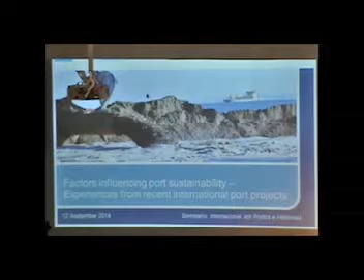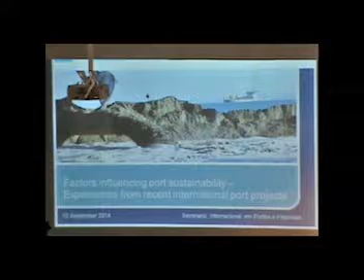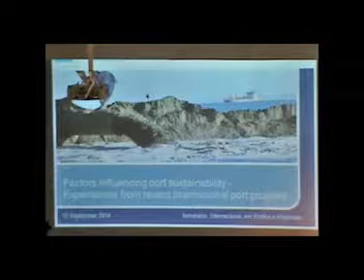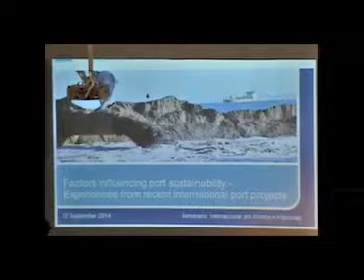I'm going to talk about some of our recent experience on a wide range of topics, so I won't be covering things in detail. We've had detail over the recent days, but I hope you find it stimulating and see that many of the issues you face with respect to challenges over sustainability are the same as we face in our experiences.

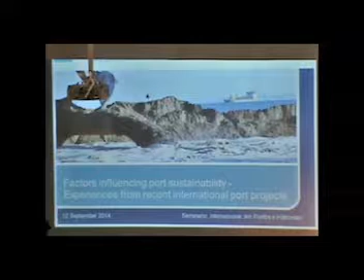What's the target? No, I'll stay here.

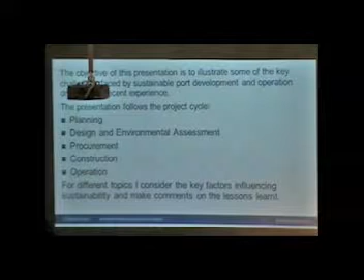The objective of my presentation is to illustrate some of the key challenges faced by sustainable development. I'm going to address those by thinking about the project cycle for a project. Think more about a port development, a marine terminal development, rather than a strategic plan for looking at how you manage the shoreline. I'll be looking through the stages of planning, design, environmental assessment, procurement, construction, and then operation of the facility.

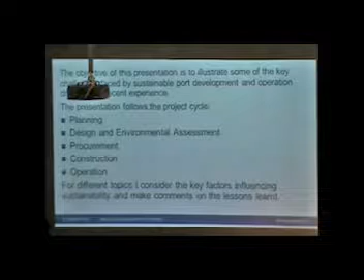In the way I talk about these factors, these topics, I'm going to give a heading for the topic, then I'll say just a few of the key factors related to that topic that I think are important based on our experience, and then I'll make a few comments about some of the lessons we've learned, hopefully to help illustrate the issues. It won't cover everything. It's not possible to cover everything, but hopefully it will help address some of the issues.

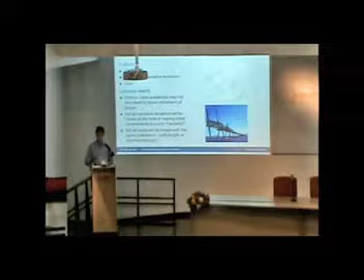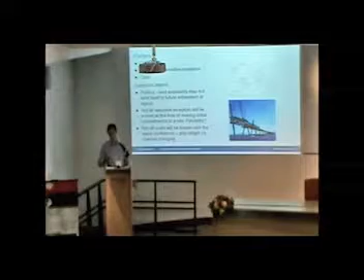The first thing I'm going to talk about is the location and layout of a particular project. Some of the factors that become relevant when you're thinking about the location and layout are the operability of the facility, uptime at berths, access through channels, and so forth. Obviously, the proximity of the development to sensitive receptors, be they environmental, commercial, fisheries, recreation, and the cost of the whole project, be that there's not just construction, but mitigation, compensation, and various other measures.

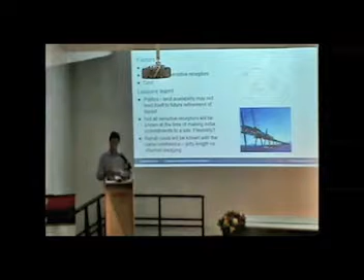One of the things we find based on projects worldwide is that sometimes very early decisions are made about the land being acquired by the developer from which the project is going to be located. There can be a lot of politics involved in that, and it's very difficult to change decisions over that initial decision. So it's quite difficult sometimes to have the flexibility to modify what you originally thought was a good idea into a better or more workable idea, simply because right at the beginning someone agreed somewhere with a handshake that this is where the project would be.

It's not possible to move it 2 kilometres one way because that's somebody else's land, and you already upset them because you made the deal in the first place with one party. So that's quite an important factor for greenfield site development. If it's a development of an existing facility, then it's going to be limited by the existing facility, but you have more flexibility around that.

Another important issue for a location is that you are unlikely to know all the sensitive receptors around that site. Those will become uncovered as you progress your baseline studies and characterization of the site. So you may not know everything about the site you've selected in the first place.

Another important point is that as you begin to think about the layout of your facility, one of the common challenges is how far shall I make my jetty go offshore, or how far shall I bring my dredging inshore to the location of my berths?

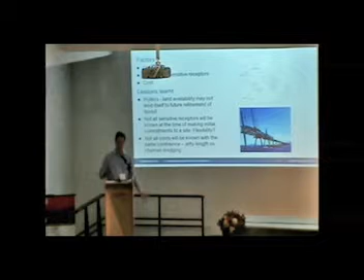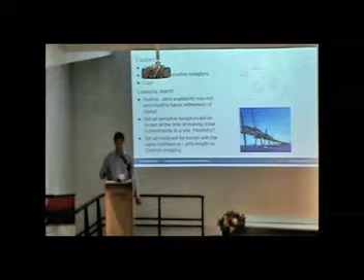Quite often, at an early stage, you can have a reasonable idea of the cost of the structure. You may have to make some assumptions about the soils, but you have a reasonable idea of the cost of the structure. But you probably don't have a good understanding of the material you'll have to dredge, so you don't know the costs of that, and you probably don't have a good understanding of future sedimentation in that channel. So you have to be quite careful in making initial judgments as to precisely how long a jetty is going to be and precisely how long a channel is going to be. Those may be variables as you progress through your studies.

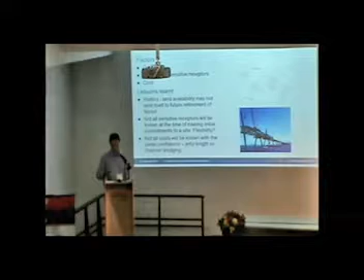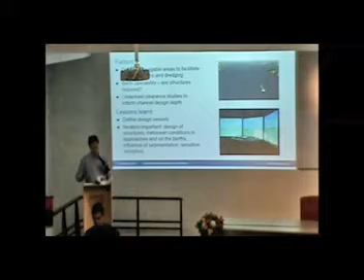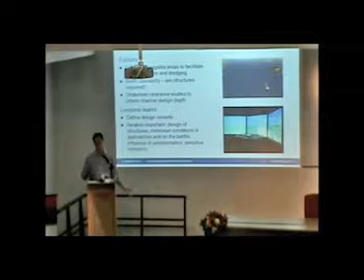Obviously, one of the important things for any of these projects is to make sure you've optimized the location from a navigability point of view. Navigation simulation studies are always necessary, and understanding the operability of the berth. How much of the time are wave conditions on the berth unacceptable, so you can't unload or load the vessel? Will you have to build structures to protect the berth to improve that position?

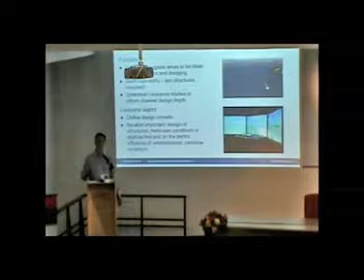And also, we talked about navigable depth yesterday, but knowledge of the wave conditions in the approaches to the berth, so you can understand how much under-keel clearance you need.

In terms of lessons to be learned from this, you need to define the vessels likely to use the facility, both immediately and at some point in the future. You also need to think about vessels that might use smaller parts of the facility during construction phases, and recognise that some things won't always be fixed. There may be changes that occur.

I'm talking about various factors sequentially, but actually you need to consider these things all at once. So navigation simulation, environmental aspects of the site, sedimentation, structures - you need to be aware of all of these things and iterate as you progress through the development of the design.

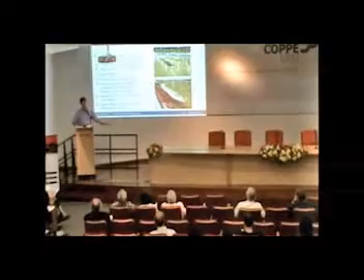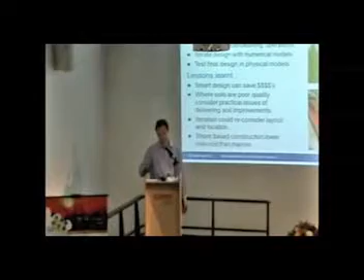Structures, I've already said, might be needed to protect the berth. Normally, I think you would be testing the basic layout of structures and what they're likely to achieve using numerical models, and then undertake final testing of structures in physical models.

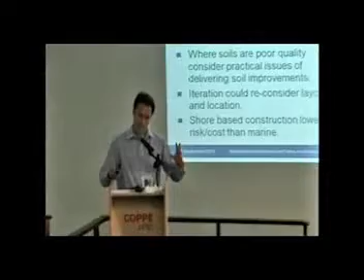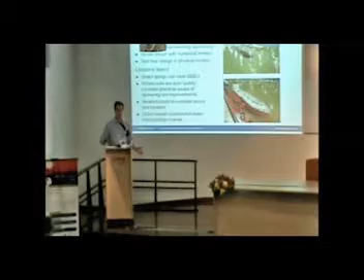Lessons to be learned really are that smart design can save a lot of money, and you may be able to combine alignments of channels in certain environments where you've got swell waves from a very uniform direction. You may be able to align your navigation channel in such a way that it helps modify the wave conditions, so perhaps you need a shorter breakwater, or possibly even don't need a breakwater at all. But there are various ways you can look at these iterations together.

Another important point to think about is that if you are building a large structure, you need to be aware of what the soil conditions are, and don't discover that the main problem with your structure is not its performance, but actually how on earth you are going to build it. You've got to make a hole to put a foundation in, and if the hole keeps filling up with mud whilst you're building it, you could be there for a long time before you start building the structure.

So smart design is important. And I think it's very important that, while we talk about concepts of jetties and dredge channels and offshore locations being more attractive, you shouldn't avoid or forget the possibility of bringing the development inshore, close to the shoreline, because land-based construction methods have many fewer risks than offshore construction methods. So a shore-based harbour or port may actually have some attractions that you discover later in the development of a design.

Soil conditions - I haven't got pictures here that point to the complexities of marine jack-up rigs and so forth for making boreholes and testing soils offshore, but obviously you need information about the soil you're going to be building structures on, and information about the soil you're going to be removing through dredging, to underpin your design and to optimize your design.

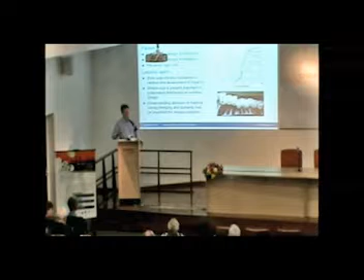Disposal of material arising from dredging: onshore, offshore, beneficial uses. I started by talking about onshore disposal options.

Many of the factors are the same, but key ones I think are, again, proximity to sensitive receptors and how close is your onshore disposal site to where you're doing the dredging. Hopefully it's close. If it's a long way, then it's going to be an expensive process of getting it there.

Any onshore disposal, you need to think very carefully about the ability you have to manage the water that's being placed ashore with the material, the transport water, and how can you manage the return of water and fine sediment back into the environment. So you're going to have plume impacts at the location where the dredging is occurring, and you're going to have them at the location where you're returning the water and fine sediment.

You also need to think whether or not you've actually got any material available to you to build the bunds for this onshore disposal. Often the in-situ material may not be suitable. Can you bring material ashore to make these bunds? Can you do it quickly enough to cope with a large project?

In terms of lessons learned, one of the key ones is to think about the consequences of putting all this salt water onto the site. There are possibilities that your dredging is happening from a river system, so you're transporting the material with fresh water. But if it's a marine environment and you're pumping salt water ashore, then the consequences for the groundwater and vegetation around the area can be quite important.

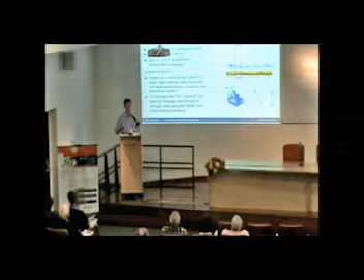If a project operator recognises that they are going to be taking their project forward with a high sedimentation issue, then they need to also understand the importance to them through the lifetime of their project of understanding and managing that problem. Because it's not a capital problem, it's an operational problem, and it won't go away.

CapEx and OpEx estimates are required to inform your design process for a project. You're balancing those two things to understand, to inform decisions you're going to make.

They're also a useful thing to have when you start considering evaluating tenders that different contractors put forward for doing the work for you. If you've made a careful estimate as to what you think the cost of building something should be, and a contractor comes with a price which is half or 4 times as much, you've then got some questions to ask. Well, what didn't we understand? What does he know? Is this somebody we want to be working with?

Minimising cost is not the same as maximising sustainability, and that's an important message that I think most large developers take on board. It's not an issue for them, they know that, but they do need to have this understanding of cost to take into their balancing of cost versus environmental effects, socio-economic effects.

But some of the information that falls out of cost estimates is relevant to the assessment of sustainability. Fuel oil is easily calculated in terms of the dredging program that's going to be undertaken. You can get a feel for how much oil is going to be used - it's going to be quite a big part of the cost, and you can think about how much CO2 is going to be used to make a particular project or to operate it. You can calculate how much steel is going to be required for piles, structures, and the dredging pipeline for the project, and you can do the same for rock and cement and concrete and other properties.